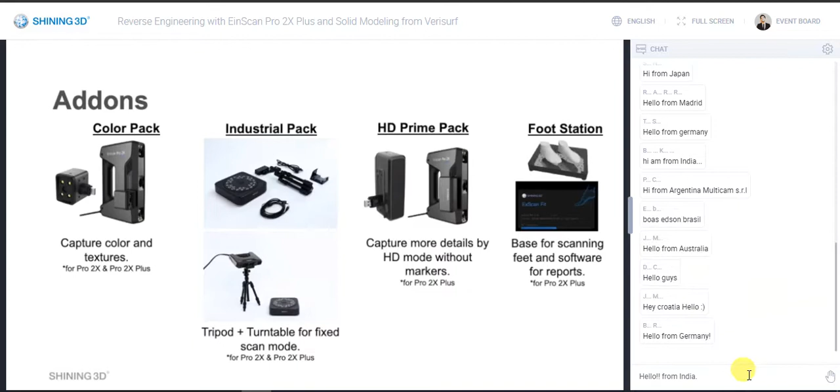And last but not least, the foot station. The foot station is also a new add-on. We had a previous webinar about it. You can only buy it for the 2X Plus scanner, and you can capture the whole foot pretty fast and even get a report automatically afterwards.

What are the benefits of our EinScan Pro 2X Plus? First of all, it's a hybrid scanner, so you can scan handheld and in fixed scan mode. We have free software updates for our scanning software, a unique software design which you will see later in the webinar, so it's pretty easy to go through. A pretty unique dark design, plug and play. So if you get the scanner, just plug it in.

We have a help mode in our software which guides you through it. We have really high accuracy. We have unlimited seats for our EXScan software, so you can install it on as many computers as you want. You just need to plug in the scanner via USB 3.0, and then you can start scanning. Another benefit is it's flexible, and you can upgrade it with add-ons, as I showed you before, anytime you want.

To shortly introduce you to the Verisurf software, Shining 3D, we cooperate together with Verisurf for the inspection part and for the reverse engineering part, which you will see today.

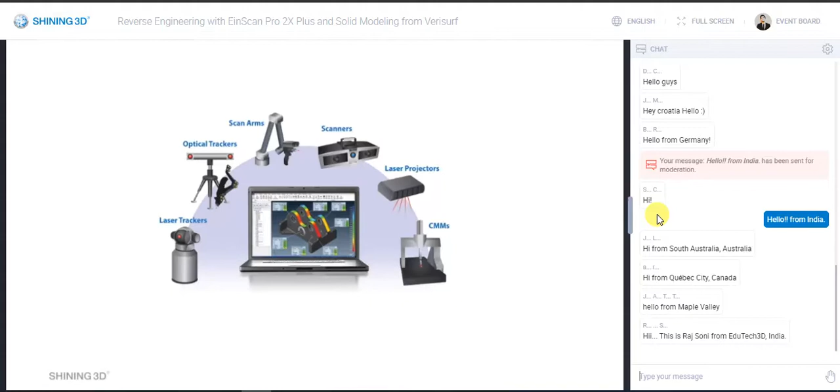So what are the benefits of Verisurf? First of all, it's a pretty heavy software, so you can do a lot of stuff with it. You can attach your laser tracker on it, attach optical trackers, use a scan arm for Verisurf, a scanner itself, a laser projector, or a normal CMM machine. So you see that Verisurf has a wide range of usage, for different kinds of technologies.

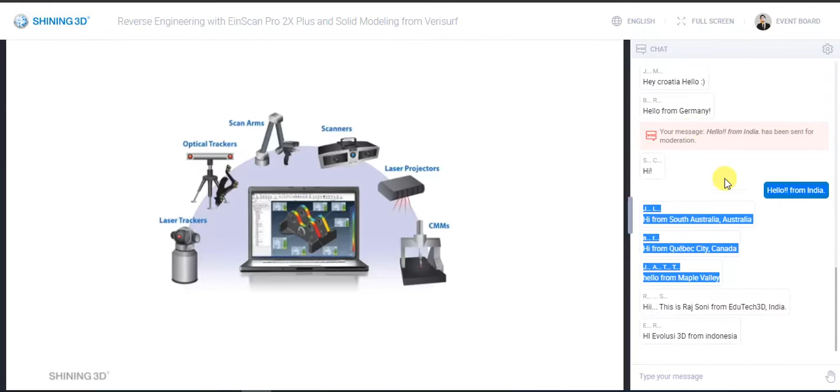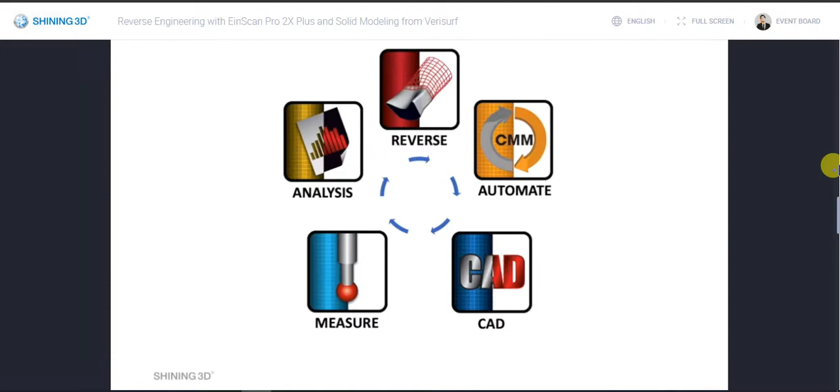Today we will only look at the 3D scanner side. To get through it, it has its own circle. We have the analysis part, which is the inspection part we showed you some weeks ago. We have the reverse engineering part, which we will show you today. The automated one with the CMM machine, a normal CAD design itself, and of course the measurement function itself.

I will first show you the EXScan Pro software, and you can see which device is connected. I'm using the EinScan Pro 2X Plus. On the right side, the calibration information shows when you did the calibration last time, and in the middle of the screen you can see the different scan modes.

The first scan mode is the fixed scan mode, which we use today. The next one is the handheld HD scan mode, and the last one is the handheld rapid scan mode. The handheld HD scan mode is only for marker scanning, and the rapid scan mode is without markers, to scan, for example, a human person or an object with a lot of features on it.

Up there you have the community button, so you can share your scans or give feedback to our software. The next one is the settings itself. You can choose the language, get the about information, and also the user feedback.

And we have the factory defaults. You have a helper mode if you start for the first time, and we have our TeamViewer as well. So if you start this, you will automatically get a TeamViewer open up, and our support colleagues can connect to your computer and check out what the problem is.

So let's start with the first scan. Let's create the first workspace. So we scan this part over here. It's a 3D printed FDM part, white.

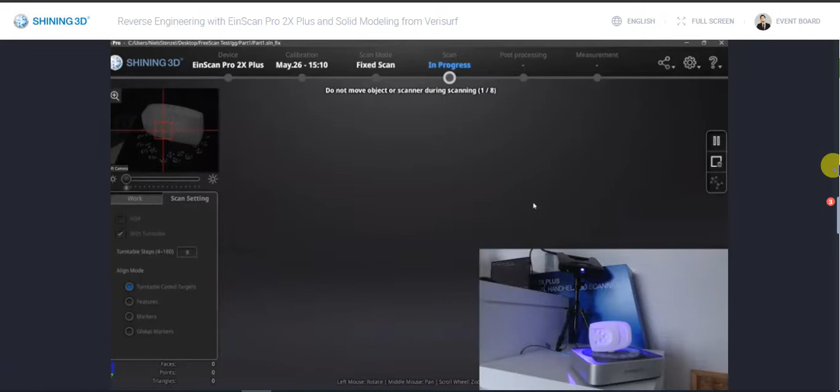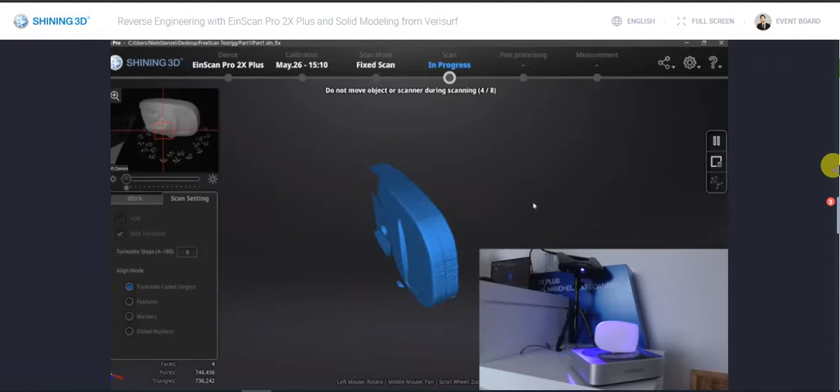8 steps is fine, and what we'll do right now is have 8 turntable steps. So it will turn around 8 times, or until it's finished scanning the whole object. That's our first 8 shots we'll do, and the software automatically aligns those shots together. There's not much more we need to do right now, we just wait until the process is finished. The nice thing is we can get a coffee or work on something else while the scanner captures the object.

It's almost finished. It turns one more time, and there we go, it's finished. We can look around, and I can see we've scanned a little bit of the blue tag over here, so we can just go in and delete it out pretty fast.

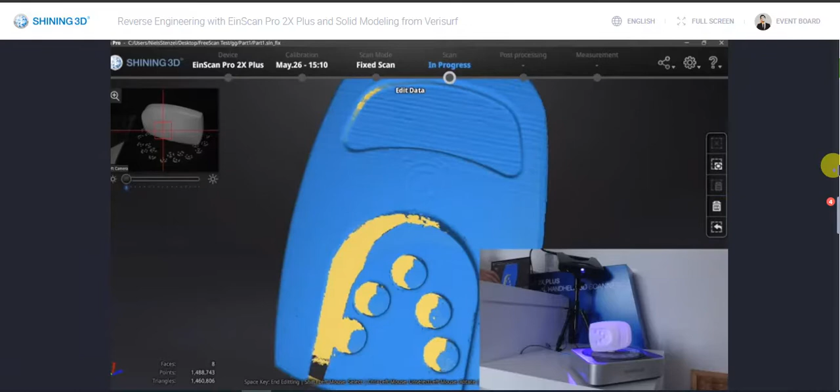It looks pretty good, we accept it. Now I'm going to turn the object to the other side. Let's put it like that, adjust the turntable a little bit, and then we press start again, check the adjustments, and go.

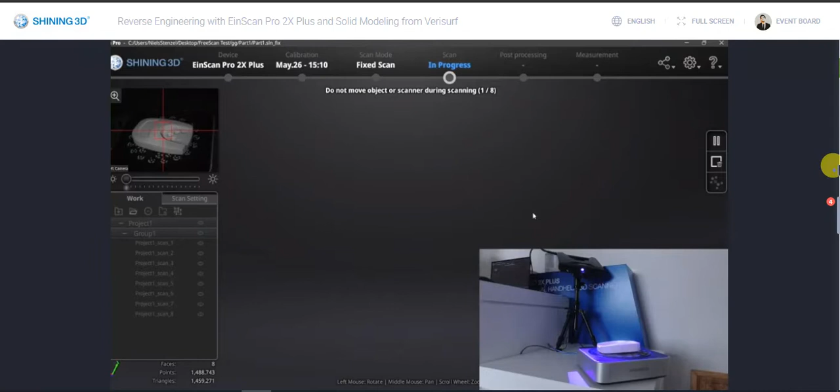It's really important to keep in mind that if you scan a white object, make sure the brightness is not too bright, or the room itself, because light can really affect the scan. If you have really bright light in your factory or office, please check that, and if the scanner doesn't capture anything, it's probably the light or the distance.

As I said, you can see the distance over here with the red cross and the cross on the object itself. If those are perfectly fitting together, you have the perfect distance.

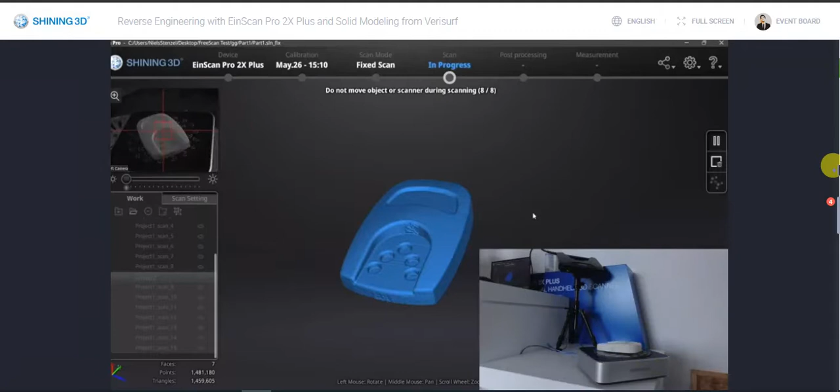You can also see now we are adding group 2, the second scan group. It's pretty cool because afterwards we can align each scan, the second scan group. We can just accept it, and the software will automatically align those two scanning datasets together. I'd say it looks pretty good already.

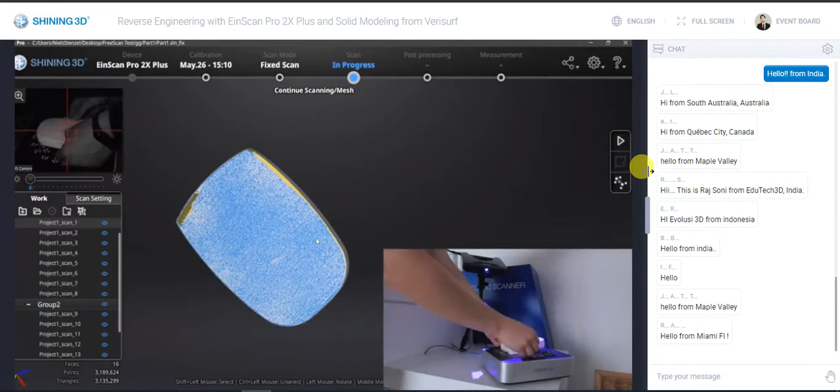We've just missed a little bit of the part, let me turn it around. I could just press start again, but that would take a lot of time, and I'm only missing the edge over here. So I'll disable the turntable and just do one shot over here, that's what we'll do right now.

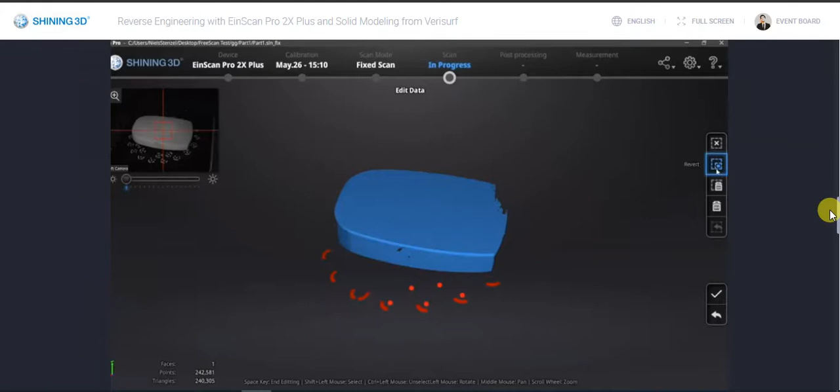Just create one shot. Let me delete all the markers you can see, because they're white as well for the one shot. No, I don't want to delete the whole object, yes, I want to delete just the markers. Accept it, and there we go.

We can see now there's a misalignment because there wasn't much to align, but it's not a big deal. We have the alignment function here, so we can drag and drop group 1 first, then our single shot, and set 3 common points, choosing them on both sides. That's pretty fast and easy, and that's how we help the software align the data.

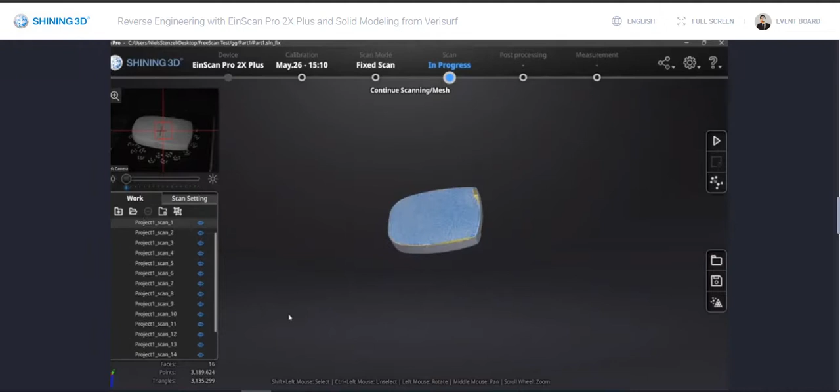So it's perfect over here. If you're finished, we click confirm, and now we have our object. Maybe something's missing, but it's not a big deal, we can adjust it later. We can also adjust the name of the projects or groups, and change that as well. We can also hide scans, if we hide scans we won't mesh them, which is really important. So I hide this scan now, as you can see, there we go.

If you're fine with it, we go on to watertight right now. Watertight means the software will automatically close all the open holes. If we didn't do that, I could also do it later in the post-process function, so we can close holes manually. But in this webinar, we won't go into that detail on the whole software itself.

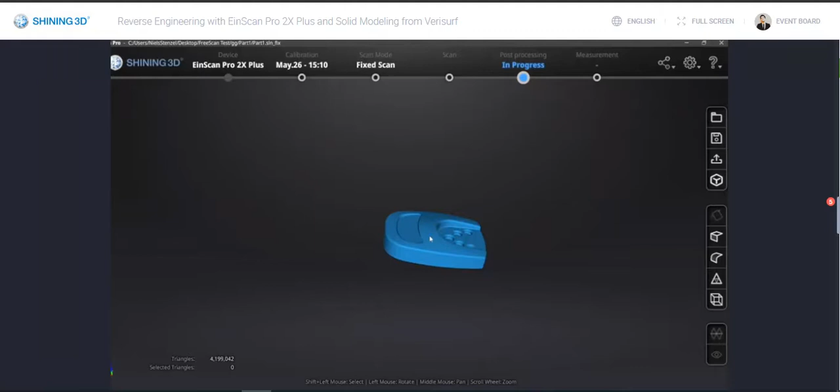Now we're almost finished, 98%, and then we move into the post process function. The first thing we can do here is smooth or sharpen the object.

That's what I want to show you right now. Let's check out how the mesh looks. Remember we had some open holes, but we don't see them anymore. Pretty nice details - we see the FDM printing and the support over here.

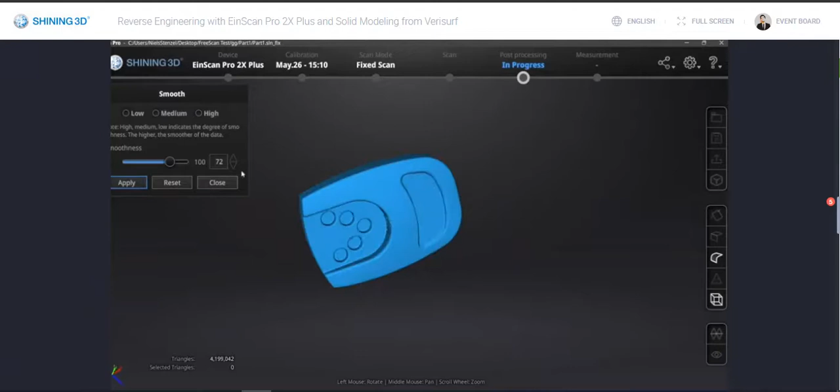It looks pretty nice, but let's smooth the whole object a little bit more, because I don't want to see the printing that much, and even if I create features afterwards, the deviation will be higher. So we'll smooth that a little bit - that will take a second. If you're not fine with the result, you could re-smooth it again, but let's say we're fine here.

The next thing we can do is simplification. Currently the file is around 100 megabytes, which is a lot, and I want to increase the speed afterwards in Verisurf, so we'll reduce it to around 50 megabytes.

Almost done, and you'll see the result doesn't really affect quality. We tried it a lot - I can say you can always reduce it by 50% and that's always fine.

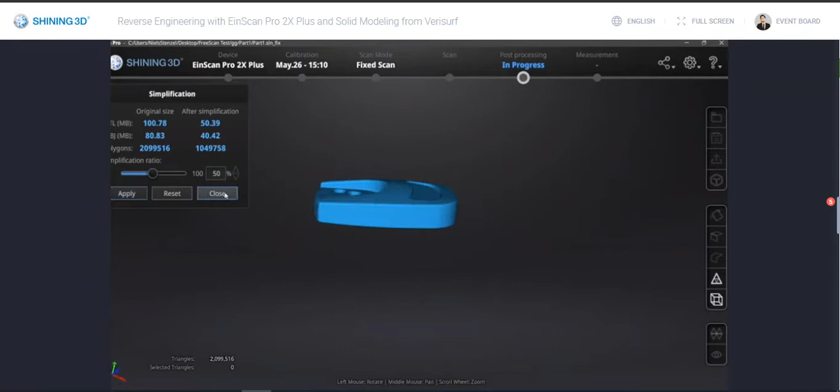So now we're done here, that looks pretty good. Let me show you a bit more, then we'll jump into the measurement function. The functions here let us first create features.

First we'll create a point. Let's get the point over here - I want to align it over there. Perfect, now let's get a line, selecting by 2 points, create, and we have the line.

And let's create one more plane here. We'll pick 3 coincident points and create a plane. That looks pretty decent, and we can go on to the movement function.

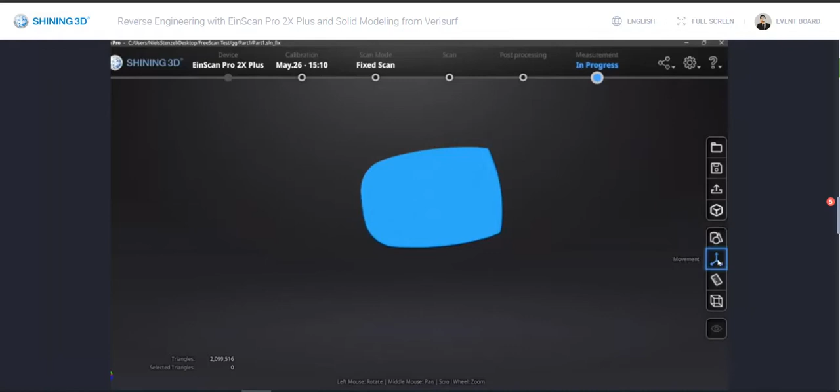Now I want to move the whole thing to the coordinate system, so afterwards in Verisurf it's easier to do the reverse engineering job. It's done here, and it looks already perfectly aligned in my coordinate system.

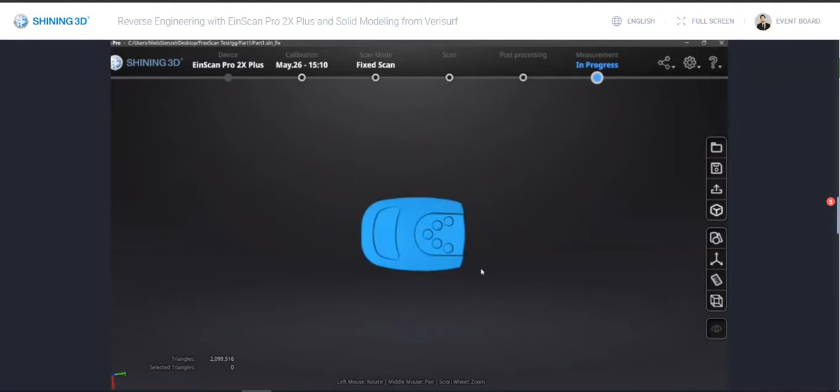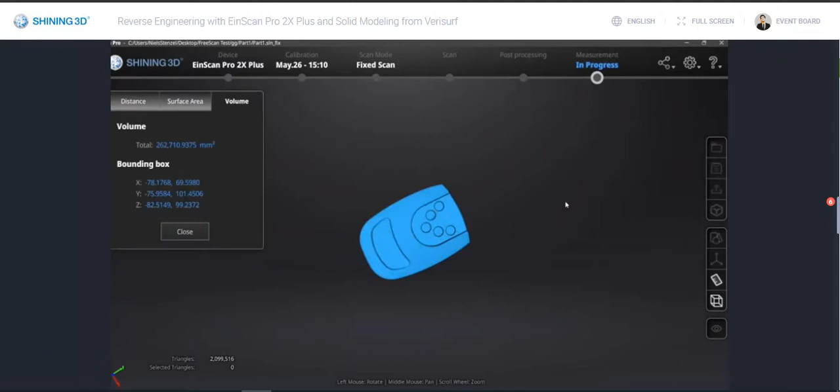Once that's done, I can go to the measurement function and measure, for example, from this point to get a short measurement and information about it. I could also calculate the surface area, which would just be calculated for the upper part, or create a volume - that only works when I have a watertight model. Otherwise you couldn't calculate the volume.

All this information, as I told you, you get automatically out of our scanning software. Let's go to the next step and just save the file here.

Sorry, I need to choose a folder for it - Part 1 folder, sorry, there we go. Now I can save it, and you can see the dimensions again.

You could also scale them, but that's it - that's the whole thing about the software. Let's jump into the reverse engineering part. Thanks a lot.

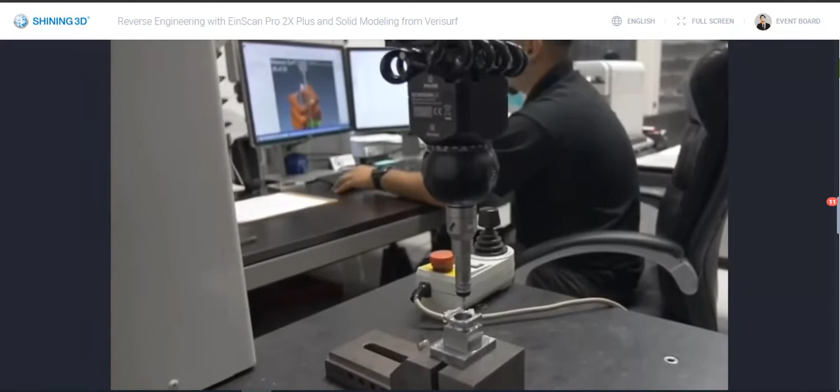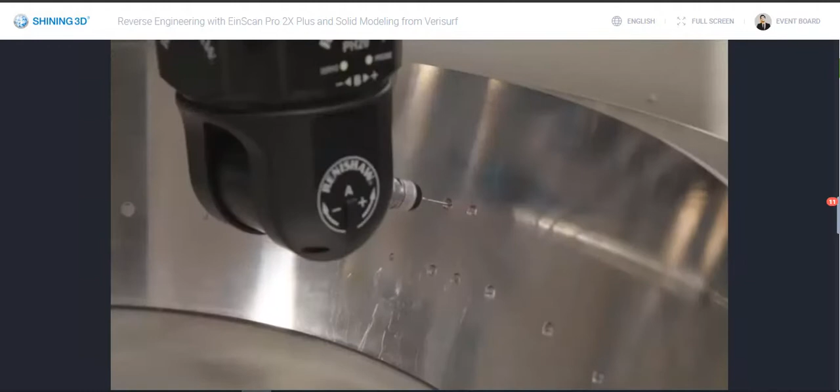Verisurf software helps manufacturers improve quality and increase efficiency while saving time and money. Verisurf works closely with customers to automate first article and production inspection, scanning and reverse engineering, tool building, and assembly guidance processes. The software lets users interact with parts both physically and digitally in real time, capturing measurement data, comparing features to nominal GD&T specifications, generating reports, and creating intelligent geometry.

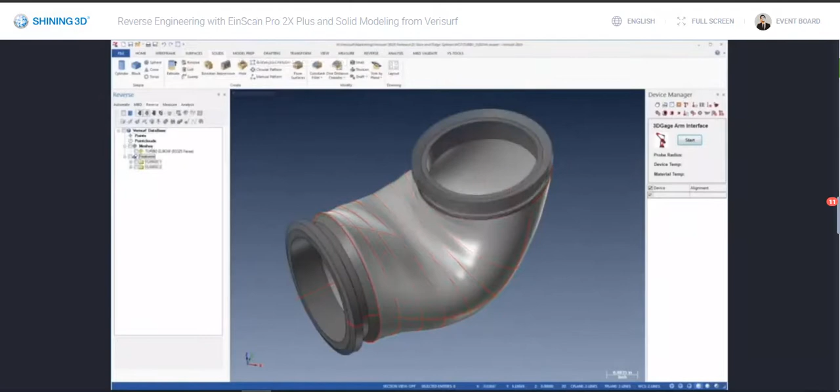One of the things that makes our software unique is our commitment to model-based definition, commonly referred to as MBD. With MBD, the CAD model is the nominal definition to which all parts are measured, and inspection is included in the CAD model. This maintains digital consistency from design to manufacturing to inspection and quality reporting. We pioneered MBD for model-based inspection, displaying real-time deviation on the PC platform, and it remains the core of our software today.

Verisurf software is built on a CAD platform with true intelligent 3D modeling, open platform architecture, and Verisurf device interface, making it compatible with virtually all CAD software and measurement hardware. With its universal compatibility, Verisurf is the only measurement software you need.

In this video, we'll be looking at reverse engineering. So we have a scanned part, a mesh file, STL.

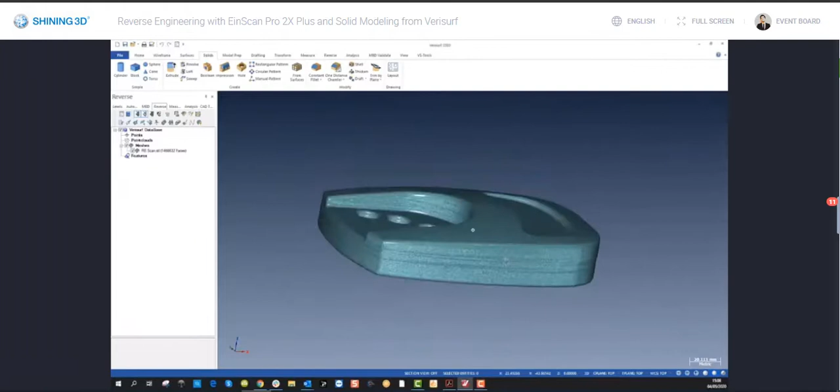First thing, let's create some geometry. Edit mesh, area select. We have different selection tools - all the typical area select, single select, neighborhood, round disk, square disk, window. We'll stick with area select. With the selection, we can smooth it, sharpen, refine, filter, delete it, copy it, cut it, and then fit features. So here now I'm going to fit a plane.

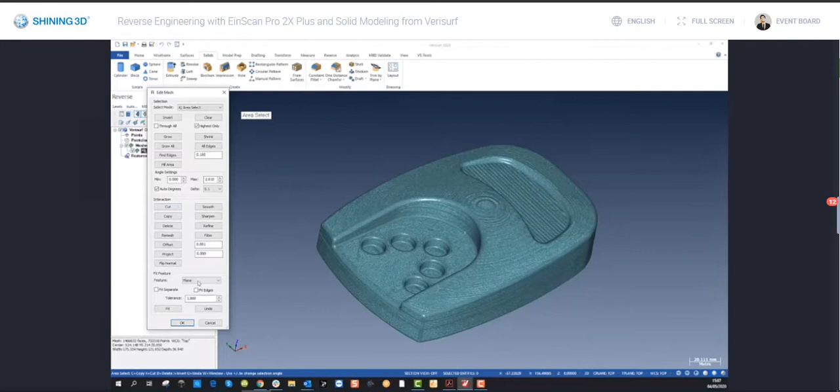We're in area select. Change the angle of incidence up. We'll just back it off a little bit, take it away from this edge down here.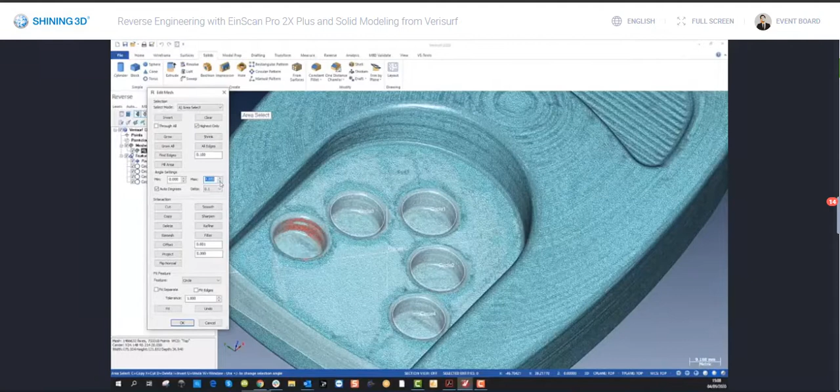Now I want to fit some circles in these holes. So it'll fit - one there, one there. Clear that, change this back down to 3. One there. Back this up a bit. Fit.

Then we can see the circles on the plane. Let's fit a couple more planes - choose the relevant feature, plane, select. We can see it's gone down the side, so we'll reduce the angle down a bit. Okay, that's good. We'll fit.

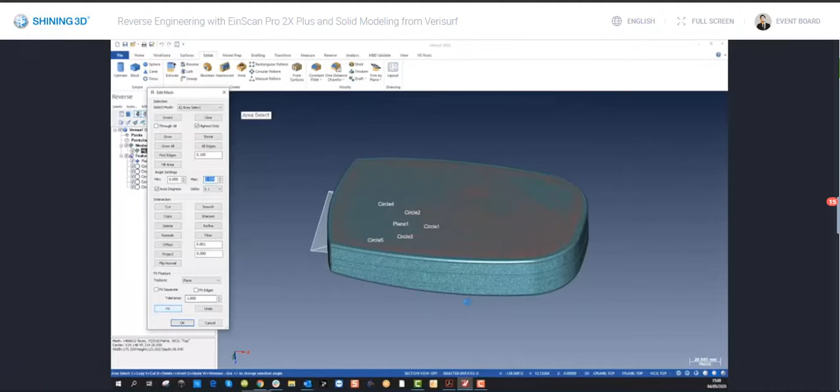Then we'll fit the last plane here in this little pocket. Change it down, let's see what 3 does. Okay, that looks good. We'll fit a plane there.

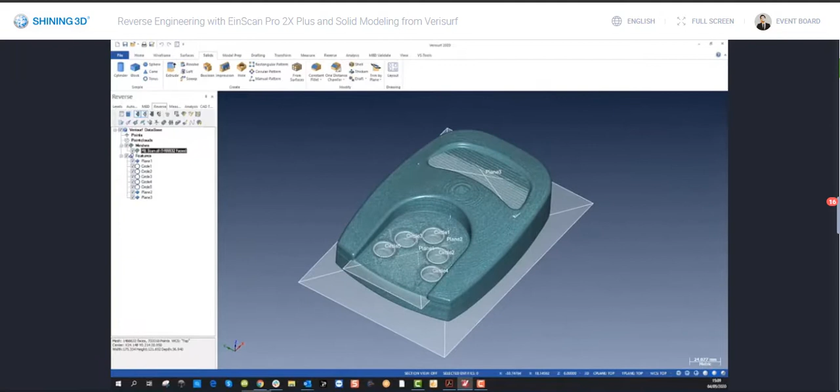Okay, so now I've got some geometry to work with. First of all, I want to look at the circles, so we can see the different diameters.

First of all, I'm going to reduce the noise in each of these. Double click, reduce noise - you can see it takes it down quite a bit, and it gets a good fit. One more.

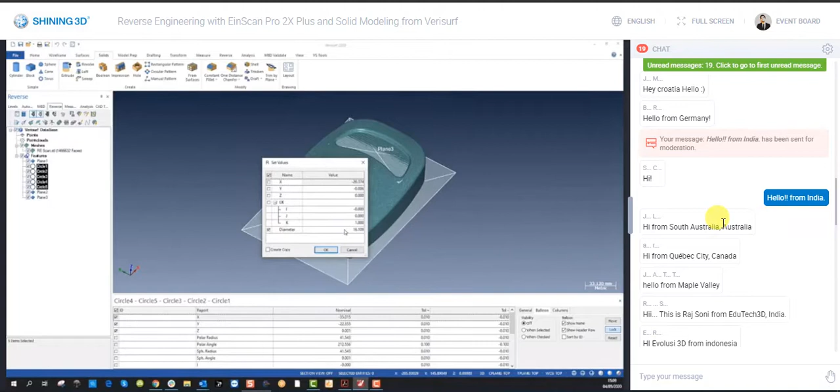Now I want to select them, right mouse, set values, and we'll apply some design intent. So we'll choose diameter, make them all 16mm.

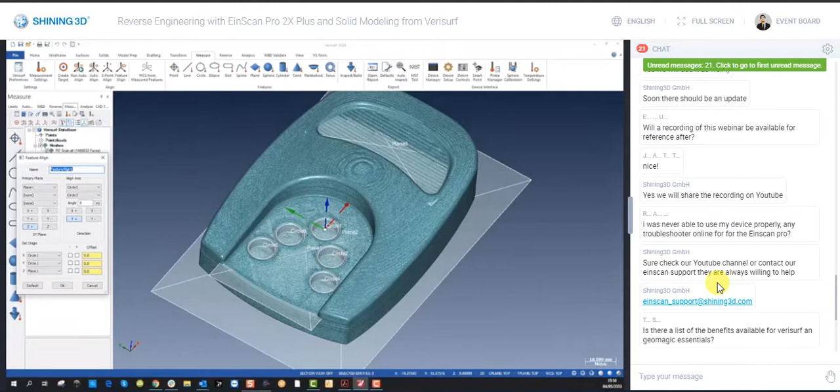Okay, so now we can do an alignment on this. Let's turn on the Nomen so we can see. Let's go to transform, measure, feature align. Plane 1, I'm going to choose the Z-axis direction for this plane here. I want to choose the y-axis to go from circle 2 through circle 3. And I want the origin to be for the xy plane, circle 1, and to take the z value from plane 1. Let's turn this back off.

Okay, so now let's start and create some wireframe geometry to work with. I'll take the circles, right mouse, export to CAD. Behind them, where you can see, there's the CAD geometry. We don't need the center points, so we can select all CAD points and delete.

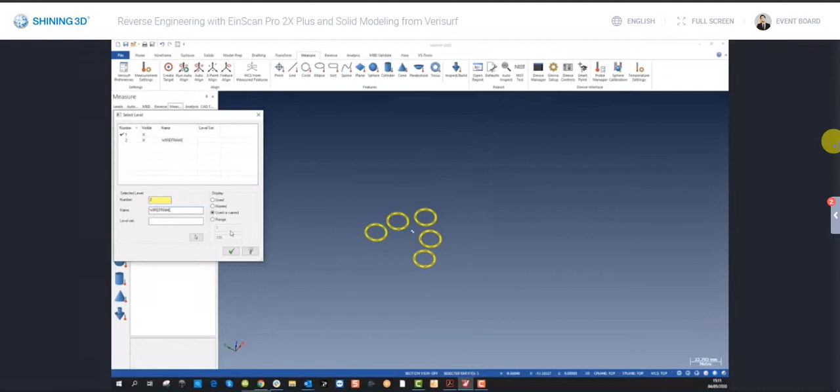So now we'll select the circles, right mouse, put it on a different level so we can turn it on and off. Now we're going to give it a number, we'll give it a name - we'll call it wireframe. Let's go back to the scan.

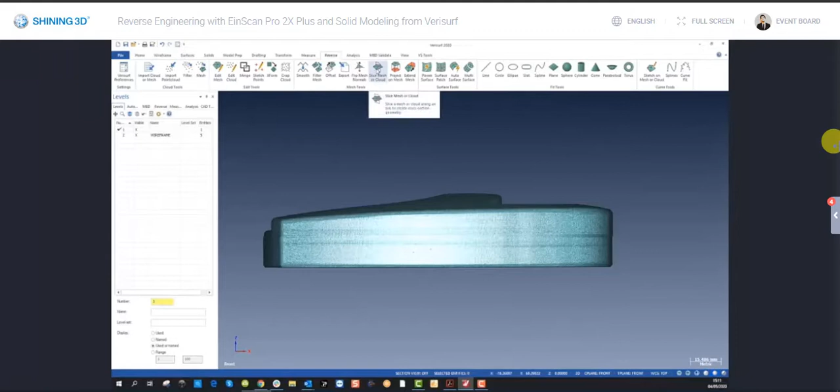Now let's start and create some slices to work with. Let's go into a nice front view. We go reverse, that was on here. Slice mesh - we can slice along the X, Y or Z. Obviously our Z goes up here. So I want to create a slice not right at the bottom because there's a radius.

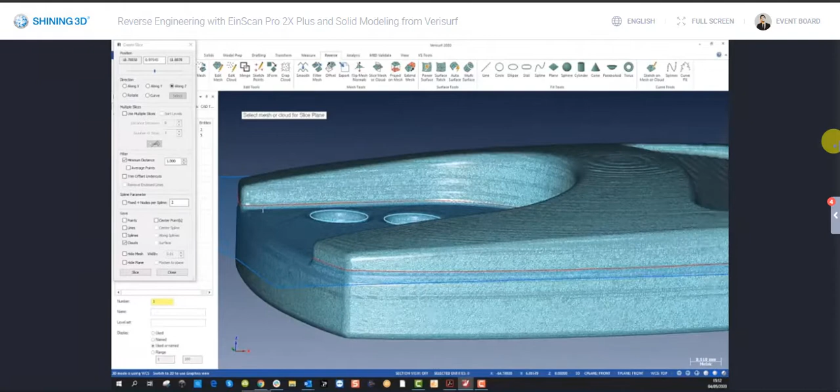So I'll take a slice here, round about where it is now. With that slice, it's just above the radius. To move it, you can drag it, or you can click in the graphics window and drag down. So I'll take it to about here. What I'm going to do is save a cloud, with points every millimeter. So I'll go slice.

Now we'll create another one. Drag this down - again, there's a radius on the bottom, so I'll come up a little bit. Maybe there. And slice.

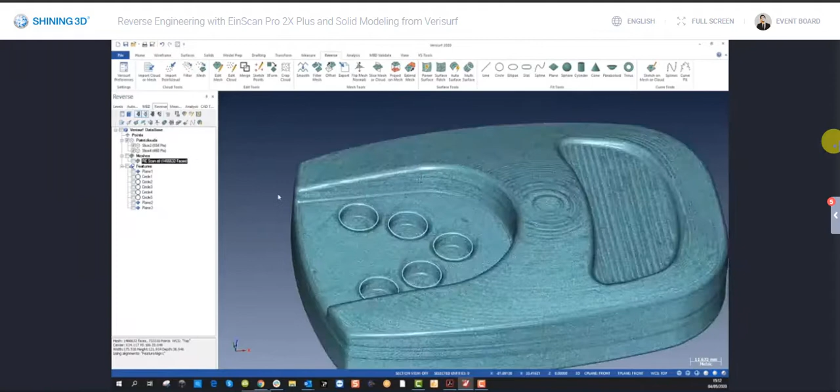We close there, let's look at this from a top view. We'll turn off some layers, and there you can see the two clouds. If I turn them off, there's the one that was on the zero. So what we'll do is send these to CAD.

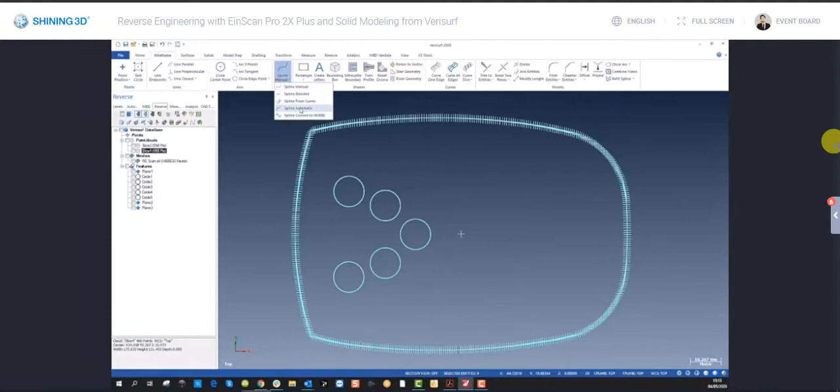Export to CAD. Now we can make a spline through these using the wireframe, spline automatic. Select the first point, let's zoom in a bit, select the second point and the last point.

Now we can go back to our quick mask selection. We don't need the points anymore, delete. So there's the spline. We still need to project it, but we have the spline. Look at this one here. Export to CAD.

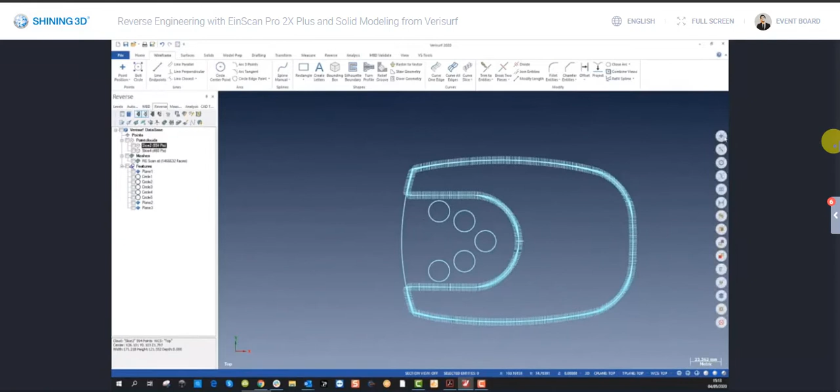Do the same again. We'll create a wireframe, spline automatic, first point, last point. There we go, same situation. Quick mask, select the points, delete. So there are the two splines. There's the mesh, and that's where they are.

So we need to project the first spline to there, and this one at the bottom to the bottom face. So we need to find out the distance between this plane and this plane, so we know where to project this to.

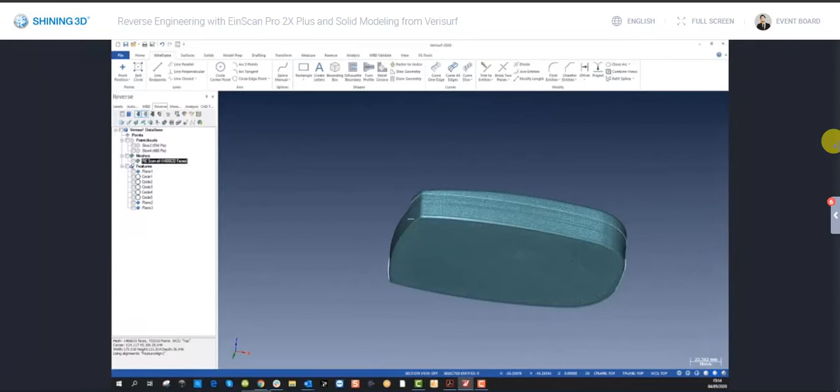So plane, if we select plane 1 and control, oops, plane 2, we can see it's between 18.3, 18.25 - let's call it 18.25. Okay, we know where to project that to.

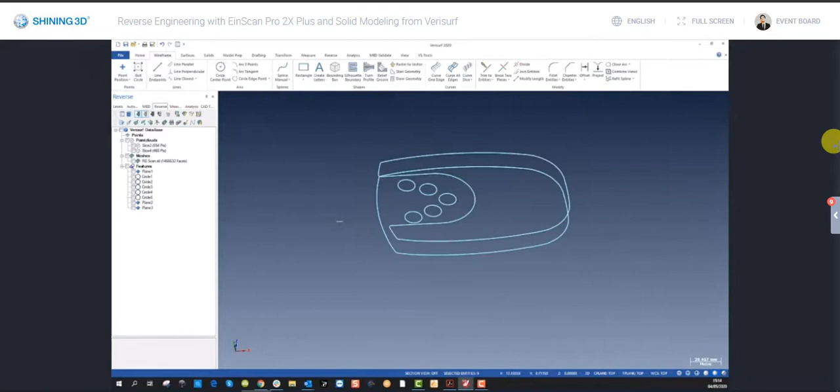So let's go on the top view, this one first, the bottom one. We'll go transform, we want to project. We select it, end selection. We want to move it, not copy it. And a depth, it's minus 18.25. Enter.

The next operation is this one. Click, end selection, and this is 0, it's on the 0 plane. So now we can click remove colors, look at the mesh. There we go. So there's the slice directly on this plane, and there's the other slice directly on the bottom plane.

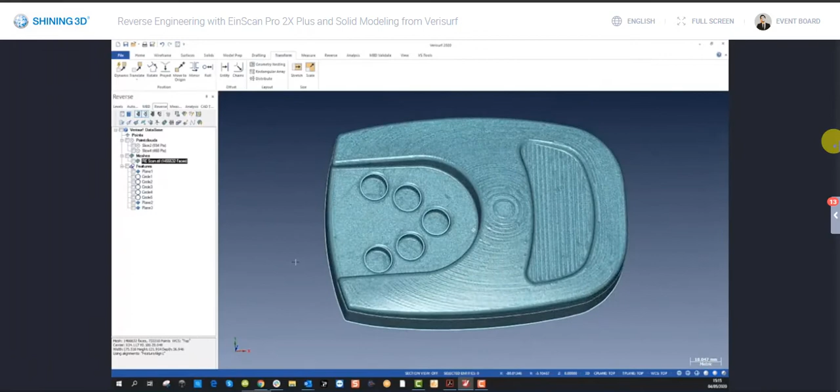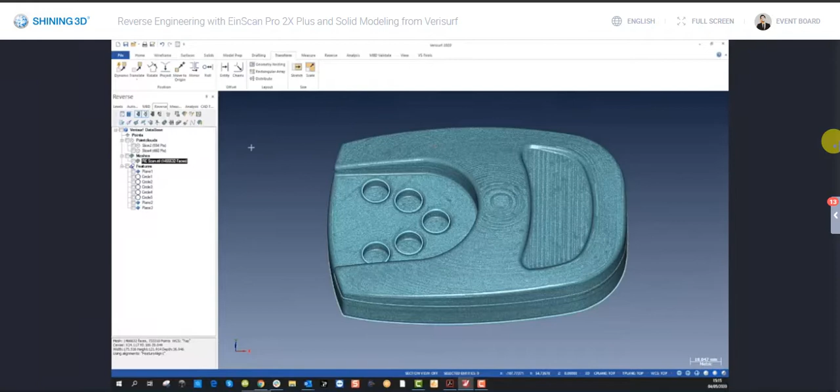So what else do we need? We can use this slice to drag and create a solid body. We have this slice that we need to just trim a bit to cut out the pocket here. So we need to create a surface out of this top piece of the mesh so we can cut the solid body. Let's go into top view.

Let's go right mouse, edit mesh, area select. Okay, that's too much there. Let's call it an angle of 3, see what it looks like. Still going down the sides a bit, so we'll reduce it down a bit. Now you can see it's just left the top surface.

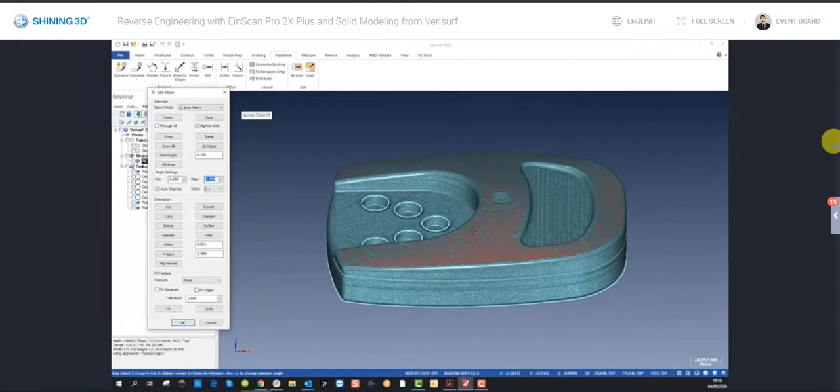So now we can copy this. Okay, so now we have that there. Let's go on the levels, select all this. Right mouse, and make sure it's on the wireframe.

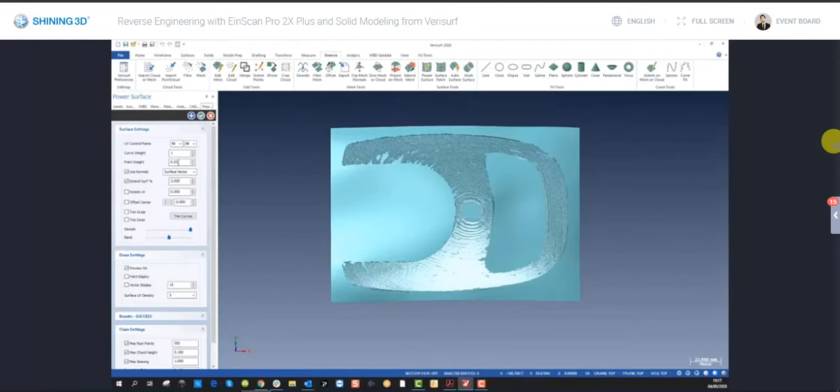Let's leave this open, turn that off. Turn on the copy, go into reverse, go power surface. So what this does is put a surface through the selection. One of the most important things is the point weighting. If I change this to 1, you can see it's not very nice at all. You want a small point weighting, 0.05. It takes the shape of the mesh that we cut.

What's also very important is to extend the surface so it comes past the outside of the part, because we're going to use this surface to cut the solid body, so it needs to extend past the solid body. So with 5%, this goes past the outside. Okay, we say okay to that.

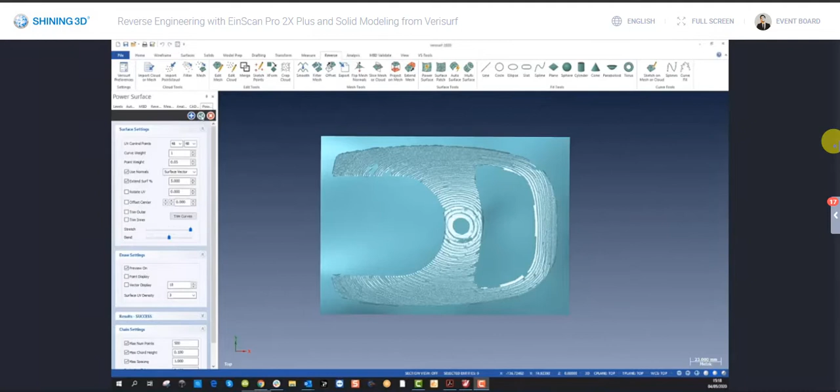So let's take this surface and put it on a separate level. Select, give it a number, give it a name, let's call it surface. Okay, let's turn it off for now. We can go back, let's turn on the wireframe.

Now we need to trim this wireframe here. So we can select this, go Alt-E and just leave this wireframe here. The bottom wireframe was projected to the base of the scan, so that's fine. We only want to use a part of this to cut.

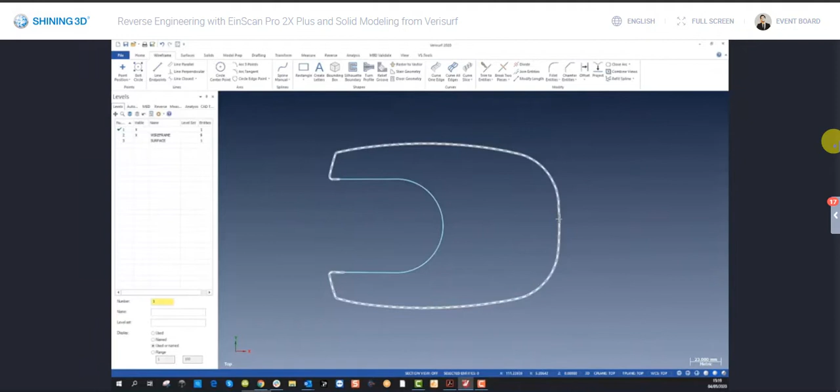So we go to wireframe, break into 2 pieces, select it where we're going to break it. Now if we break again, select, break here, escape. So now when I select this, I can see the selection, I can click, delete.

So now I want to take it past the edge of the part. If I put this on wireframe, we want to take it past the edge just to make sure we're completely free of the solid model.

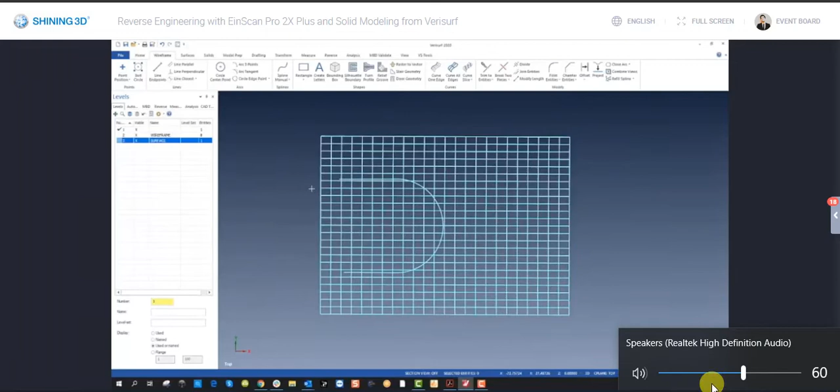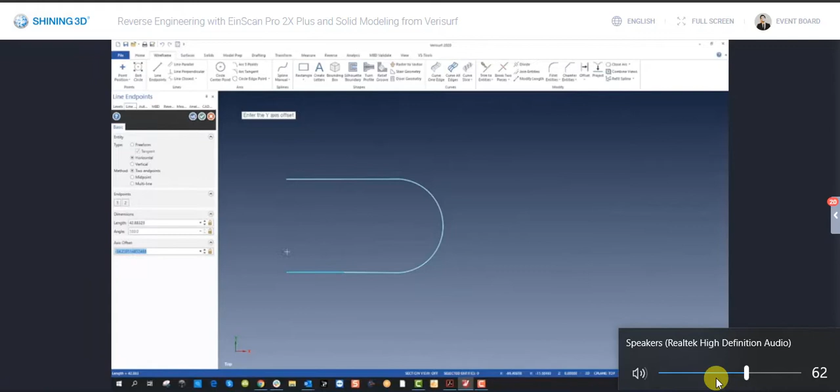Okay, so what we can do, let's turn this back off. We're in the top view, just make sure, yes. We want to create a line, so we'll go line endpoint, and we'll do horizontal. Click here, drag it out. Click this one, start to drag it, and then if we click here, it will make the line the same size. Go vertical, click here, click here. So now we have a spline to cut the solid body as well.

So we go Alt-E, just bring back the rest of the selection. We want to make sure that these splines and this is projected to the 0, just to make sure. Transform, project.

We'll select this, we'll select the circles as well. Go end selection to the 0. Enter, we're going to move them. Okay, so this spline and these circles are directly on the 0 axis.

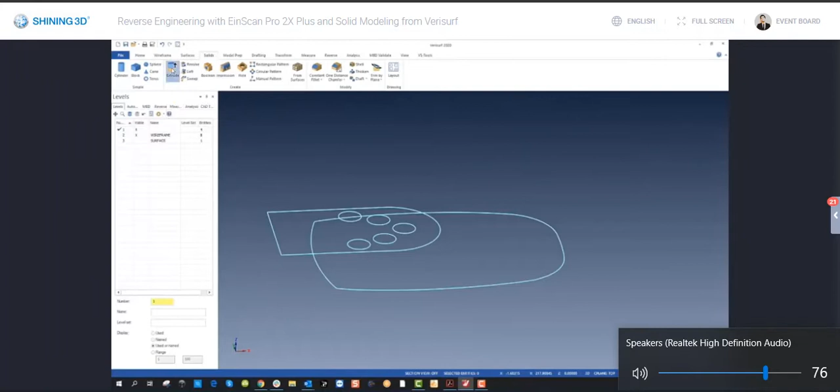So now we can start and create some solid bodies. Go solids, extrude. Let's choose this one, and here we want to make sure that it passes. So you get a slider bar, we need to pass the scan. So here we could type 40, it's going to pass it. Solid, accept. So now we have a solid body there.

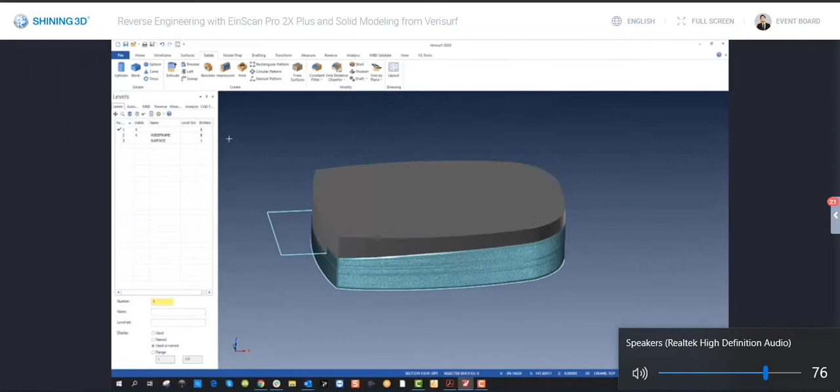It's passed the scan. So now we want to cut this solid body with the surface we had before. Let's turn this off, let's go top view. Let's turn on the surface. Okay, so now we're going to cut the solid body with this surface.

So we go into the solid menu, trim by plane, hit the drop down, trim to surface sheet. So we select the solid body. Now it's asking us to select the surface. Okay, we want to reverse the direction. That's good. Now we turn the surface off. So now we've got, starting to get the essential shape of the solid body.

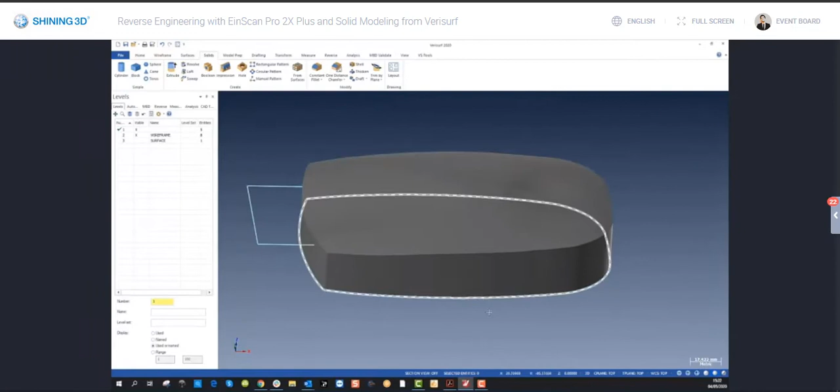So now we can extrude this one, this, enter. We want to cut the body. Okay.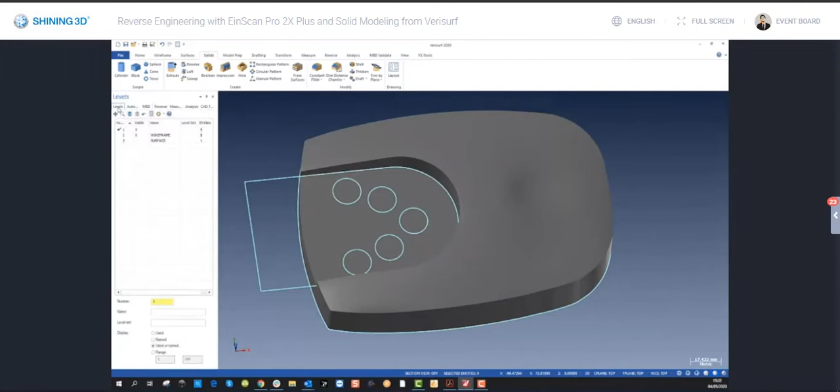Now we need to find out how deep these holes are to cut. So if we go to the reverse tab, let's turn off the solids. Well, put this on a separate level. Select the solid, select, give it a number, give it a name, solid. Okay, let's turn it off for now.

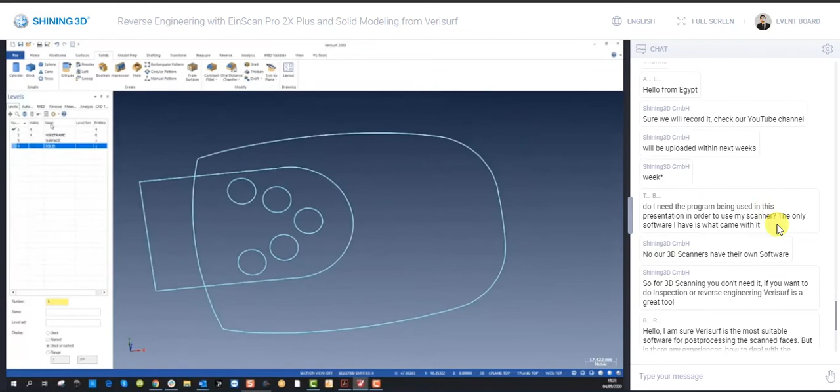Go back to reverse, turn on the mesh. So we want to know the depth of these holes. We've already got plane 1, so let's go edit mesh, select plane, let's choose one of them. That's too much, let's go down to 3. Okay, let's fit a plane.

So if we look from plane 1 and then control, plane 4, okay, 7.05345. So let's call it 7 millimeters. Okay, we don't need this plane now, we can delete this. Yes, okay, let's turn back on the solid.

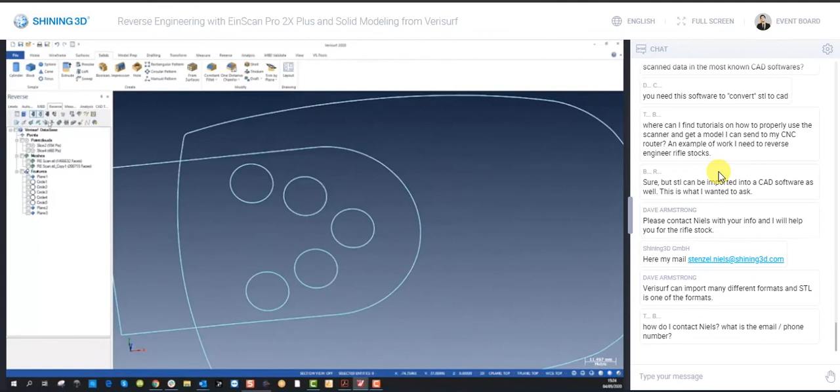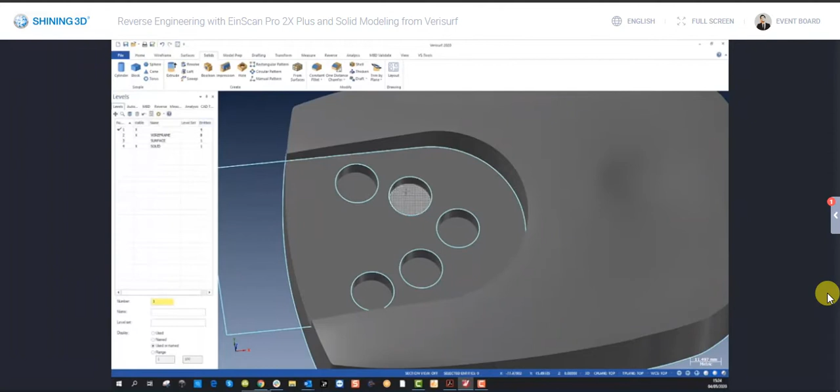Let's go extrude, select these circles. Tick. And here, 7. And we want to go the opposite direction, down. And cut body. Okay, so now it's starting to take shape.

So now we need to, let's go back to reverse, turn the mesh on, go to top view. And we'll slice the mesh again. Go reverse, slice. Okay, it's in the Z axis.

We can use the slider bar. And bring it in, and see how it's bringing it in there? See there? Slowly take it back. We want to capture this slice here. We can see it there.

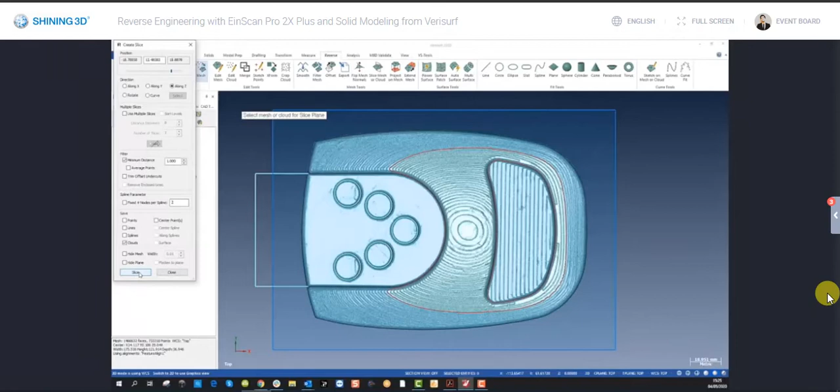That looks good. Again, cloud with points for millimeters spaced. Go slice, let's close this, hide the mesh. Okay, there's one, there's the other.

We don't need this one, we can delete. That's the one we want. In fact, we can delete these other two, we don't need them anymore. Okay, so this one we export again, same procedure, export to CAD.

Now we can create again the curve. We'll go wireframe, manual spline, automatic. Zoom in a bit, click the first, click the second, click the last. Again, we don't need the points.

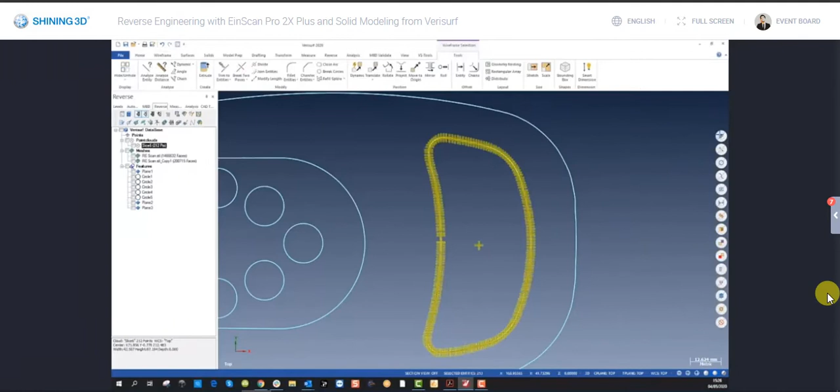Delete. Okay, so now we need to project this to a plane. And we had that plane there, like this. So we can't do anything with a measured entity, we need to make it CAD. So export to CAD, so now we have a CAD plane here.

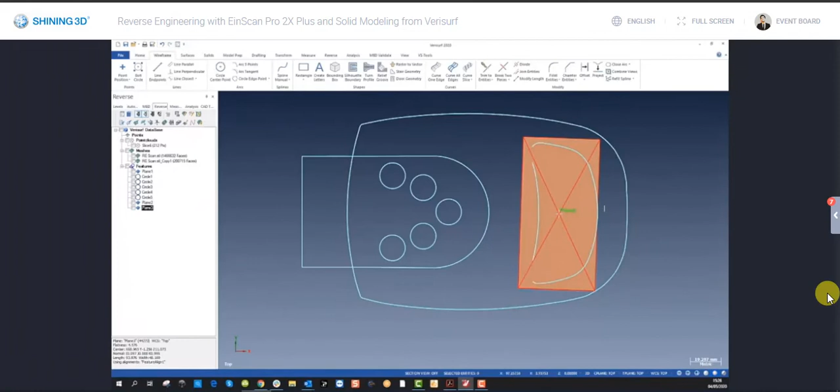I want to grow it a little bit. Tools, grow plane. Just so it passes, we need to project the plane onto there. Okay, so you can see that the spline is above the plane. So let's go to transform, project, select the wireframe.

And here now we tell it to project to a surface. Click, and now you can see it's projected to the plane. Right mouse, clear colors. Okay, so let's take this.

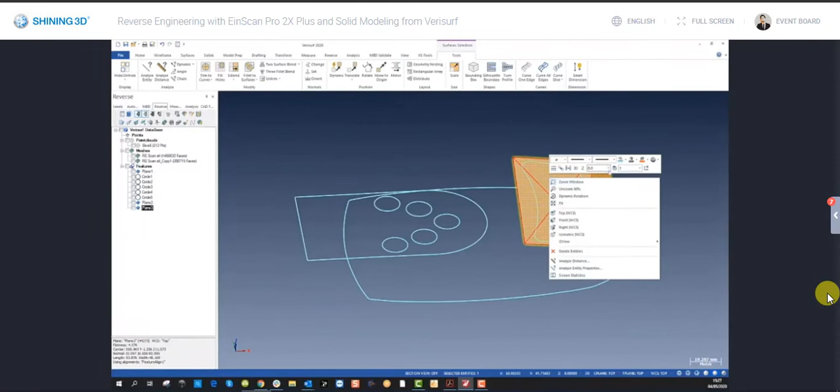Right mouse, select, let's put it in the surface layer. Okay. Now if we look here in the solid, okay, let's go wireframe so we can see through.

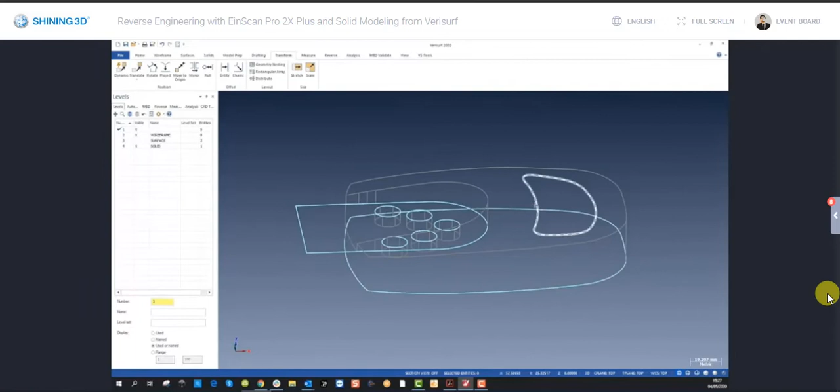Okay, we'll extrude this now. So go back to solids, extrude, select the curve. Okay, go back to shaded so we can see what we're doing. We want to go the opposite way. Okay, and there's the extrusion.

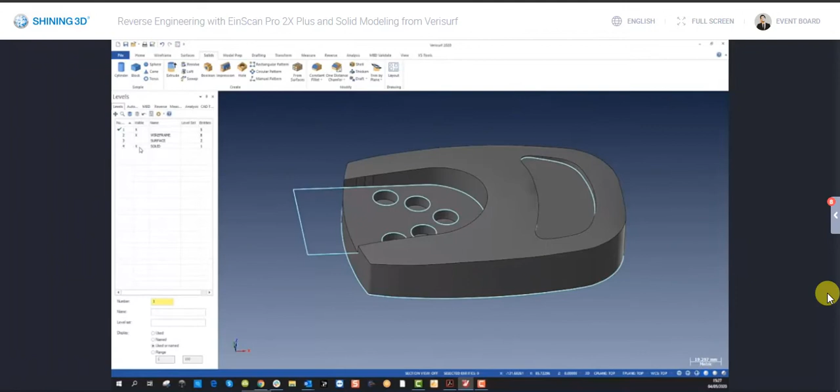Okay, let's turn off the solid. Let's select everything, make sure it's on the wireframe. Okay, let's turn the wireframe off, solid back on. So there we can see we start to build the shape of this.

So now we could put some fillets on. Let's select the face. There. There. There. Here. And here. So okay.

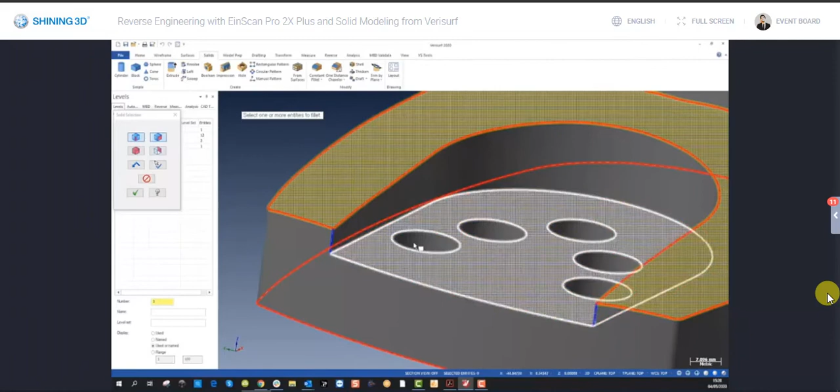Let's try 1.5. Okay. So there we have the scan turned into a solid model. Okay, so that was a quick video on reverse engineering from a scanned part.